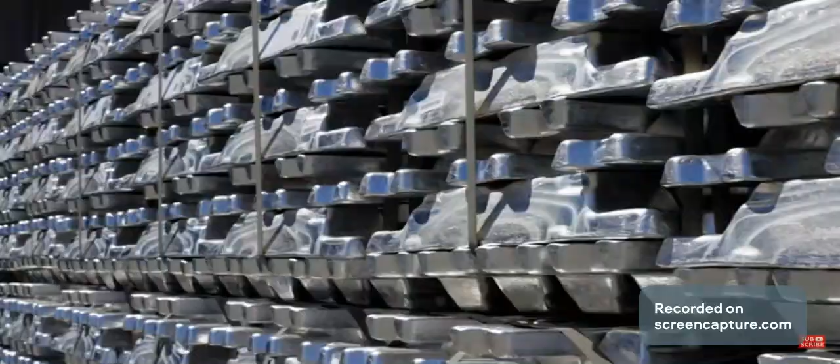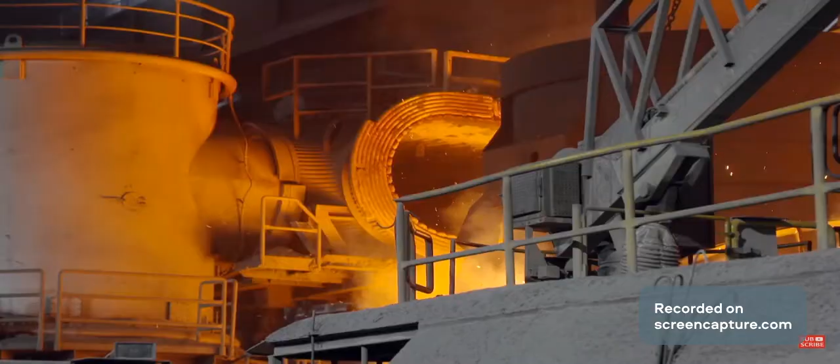Steel, aluminum, cement, indispensable for us all, but their production is a gargantuan problem for the environment. If we want to save our climate, our Earth, we need to profoundly change industry. Because it's heating up our planet, with greenhouse gases and an insatiable appetite for energy.

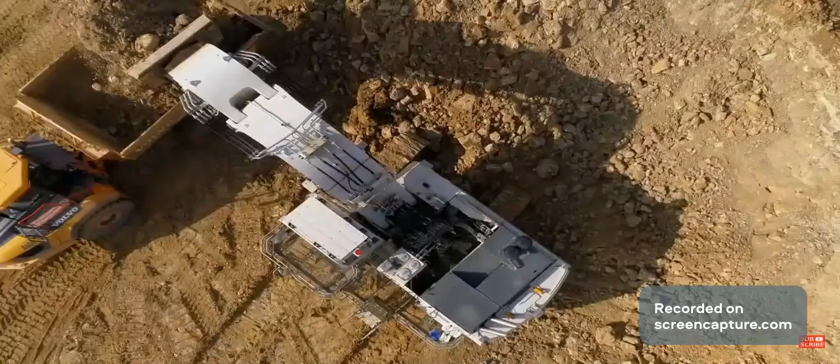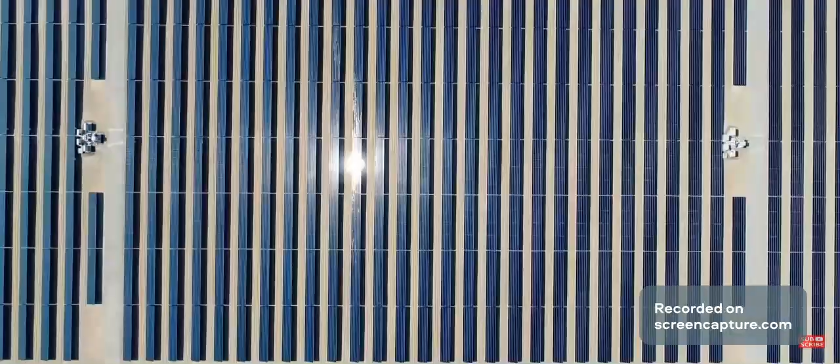A climate-friendly commute to work. Dr. Mohammed Safi's routine for 15 years. I cycle to work whatever the weather. I see it as a challenge, as a task. I need to do my bit in both my professional and my private life.

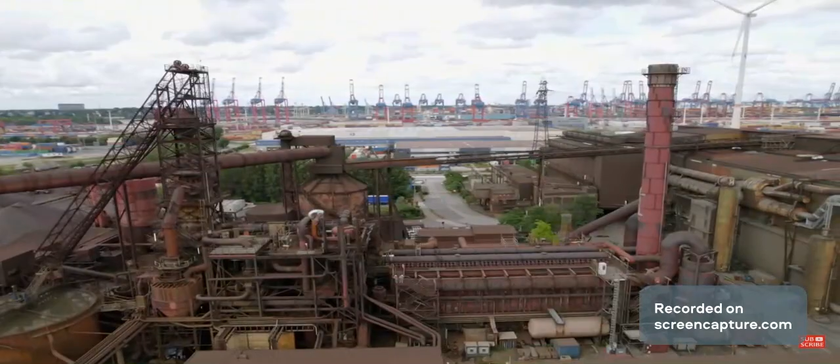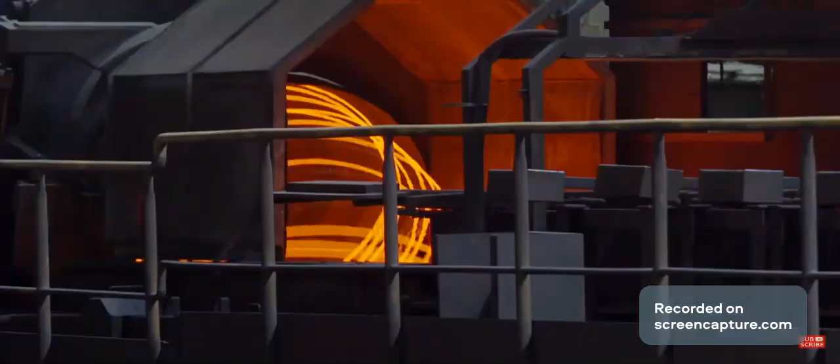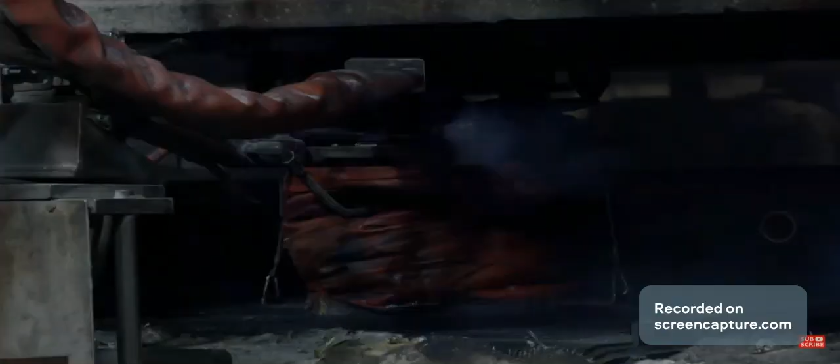But in the workplace, that's not so easy for Mr. Safi. His employer produces steel, making it one of the big environmental offenders. The engineer is deputy plant manager at ArcelorMittal in Hamburg, responsible for the smooth running of the furnaces. Steel. We can't manage without it. It's in buildings, vehicles, and household appliances.

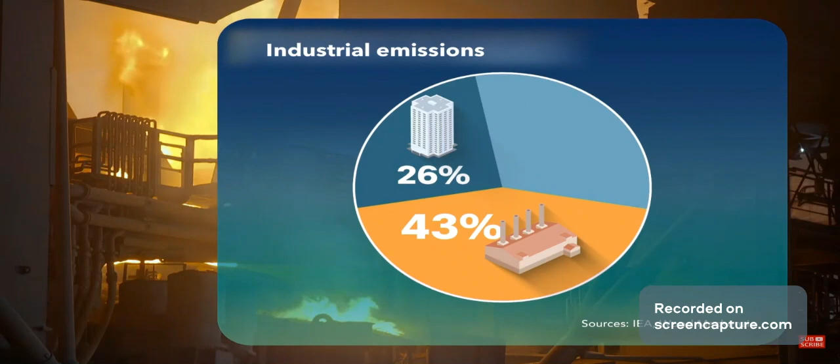But its production is harmful to our climate, and the steel industry isn't the only offender. If you include energy and heat consumption in the math, the industry is responsible for 43% of global emissions, significantly more than the construction and transport sectors. More than 70% of industrial emissions stem from the manufacture of just 3 basic substances: steel, cement, and chemicals.

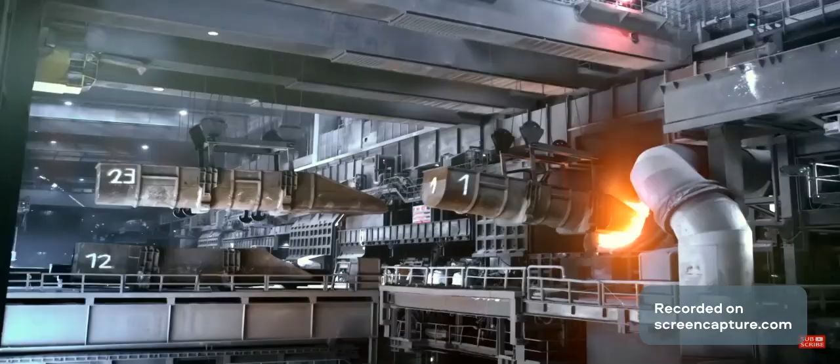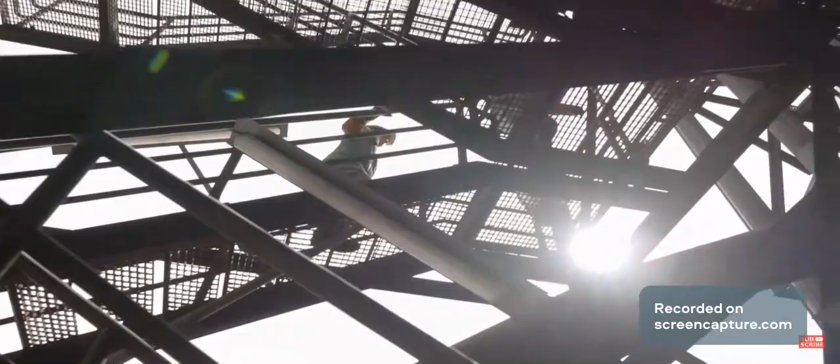Steel production was responsible for some 3 billion tons of CO2 in the last year alone. Mostly to blame, the blast furnaces, where the vast amounts of coal are burned. The production of 1 ton of crude steel results in 2 tons of CO2. Normally, but not in Hamburg. Here, something's happening that's a better fit for Mohammed Safi's philosophy.

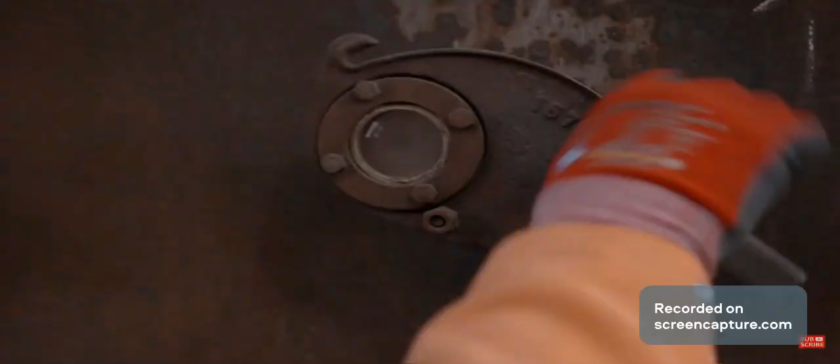I'm personally trying to live an eco-friendly life. That's why I'm pleased if the process I'm working in is also climate-friendly and isn't causing lasting environmental damage. But how's that supposed to work? Climate-friendly steel production? The first ingredient, natural gas replacing coal as a source of energy. This emits less CO2.

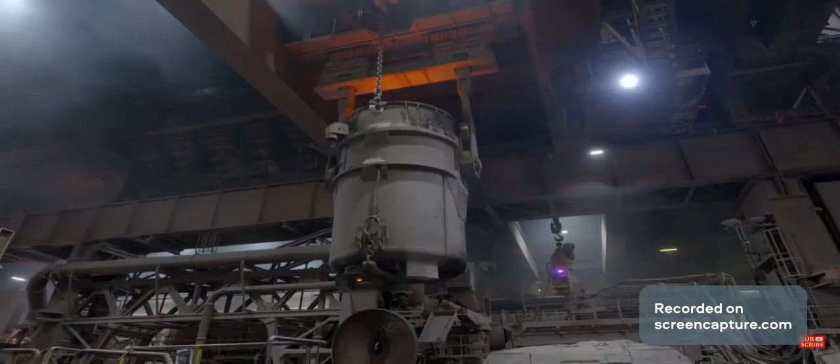Ingredient number 2, steel recycling, cutting emissions by 2/3 compared to production in the blast furnace. But researchers see perhaps the most potential in green hydrogen, a source of energy seen as a future replacement for coal and gas, which is expensive and now in short supply. It's a crucial time for Mohammed Safi and his boss Uwe Braun. They're discussing where to locate the new hydrogen plant.

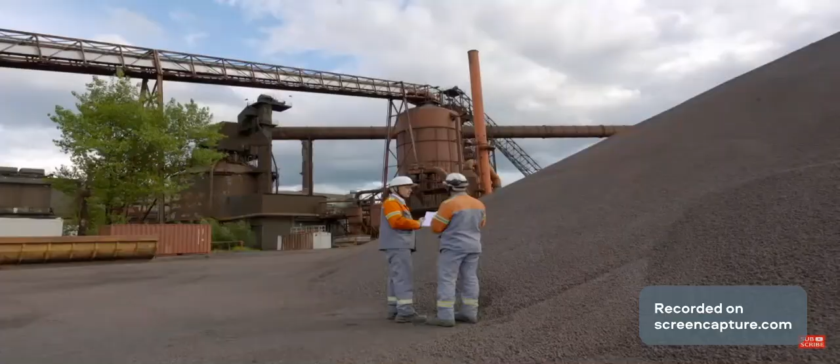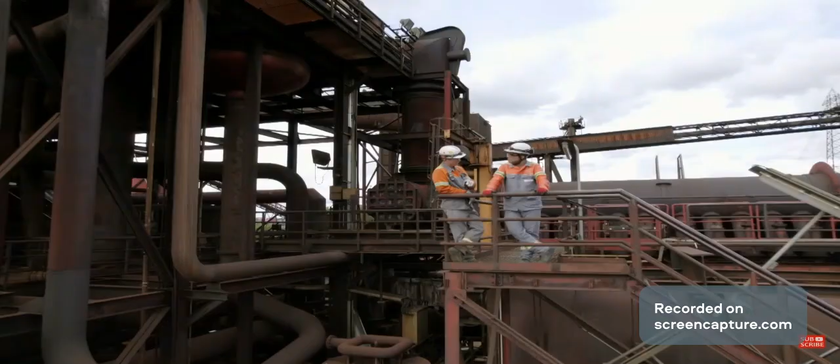We're the trailblazers. We've got the means to move things in the right direction. But we also need support on a political level. On the one hand, we need vast quantities of hydrogen. We need the green electricity and, of course, the economic framework for our products. In other words, it's going to be expensive. On the road to emissions-free steel, who's picking up the tab? And how long will it take?

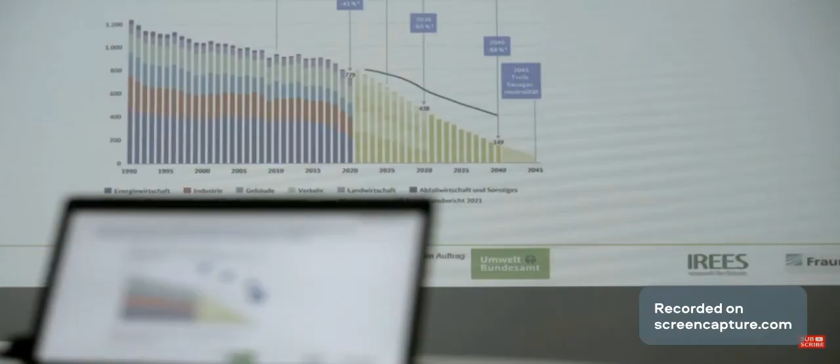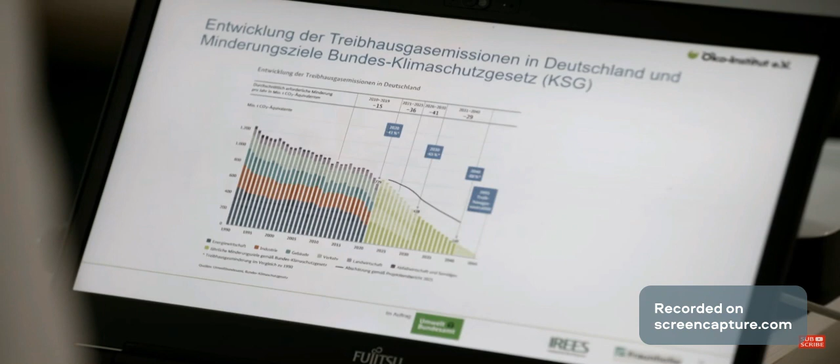Germany's climate action package sets out an ambitious roadmap for the years up to 2030. Economist Katja Schumacher says much of the pressure is now on industry. A lot still needs to happen before 2030. Emissions have to be reduced by another 30%. The government's official projection reports suggest that if significantly greater efforts aren't made now, industry won't hit its targets in 2030.

Some individuals are well on the way to hitting their targets. One of them is Mohammed Safi. He tries to adopt a green lifestyle wherever possible. He built his house in 2012 with environmental protection in mind. There are solar panels on the roof. His heating system runs on geothermal energy, making it 100% climate neutral.

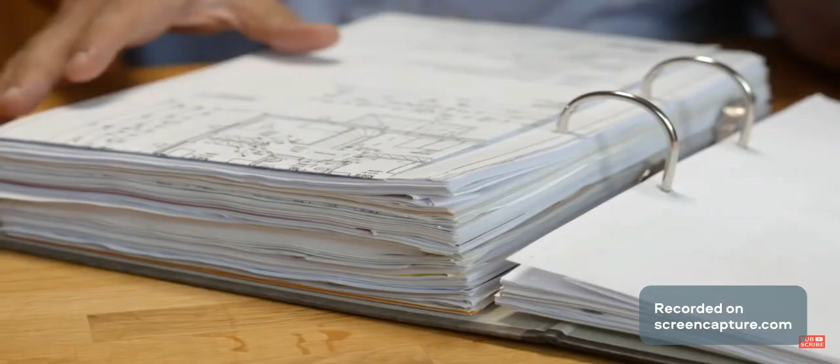But for the engineer, there's always room for improvement. Together with his sons, he weighs up how to make his home even more eco-friendly. At the moment, the roof only has solar panels facing south and west. It would be good if we could include the eastern side to use the sun's energy in the mornings too.

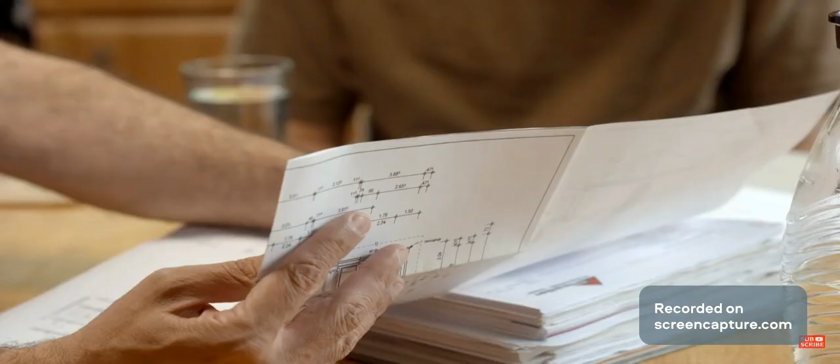Compared to what industry needs to do, his contribution to climate protection is tiny, but everyone can play a part, whether it's separating trash, installing solar panels, using electric cars or public transport. If every single one of us makes little contributions like these, of course the overall effect will be huge. But not nearly as huge as measures taken by industry. After all, it's been producing the most harmful substances to date. But can these emissions also be useful?

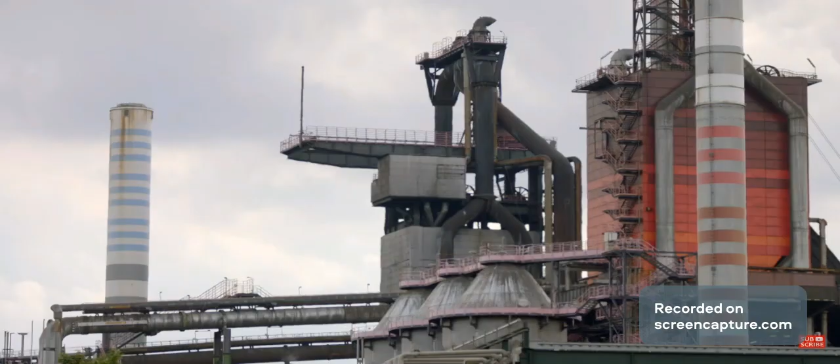Steel production at ThyssenKrupp in Duisburg. Here, experts are homing in on waste gases from steel production, primarily carbon dioxide and carbon monoxide. In the past, they were usually flared off.

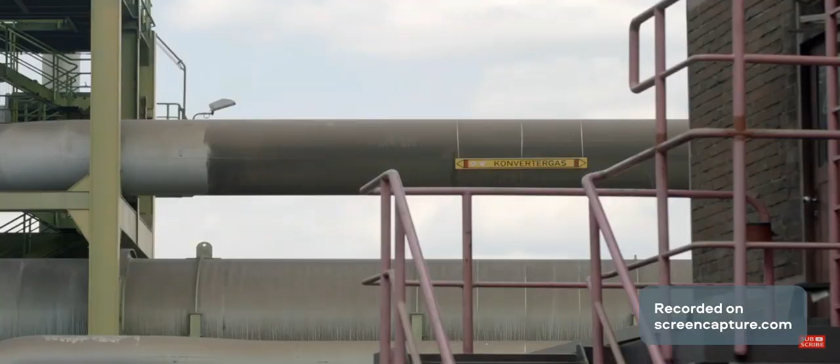Physicist Markus Oles now collects them with his plant. His goal, to utilize waste gases as a raw material. Today, it's not possible to design all chemical processes in a way that produces no CO2 at all. And steelmaking is ultimately a chemical process. The question is what to do with it afterwards. And we think we've found an answer. To pass on remaining CO2 emissions from one industry to the next, where they can be recycled as a raw material.

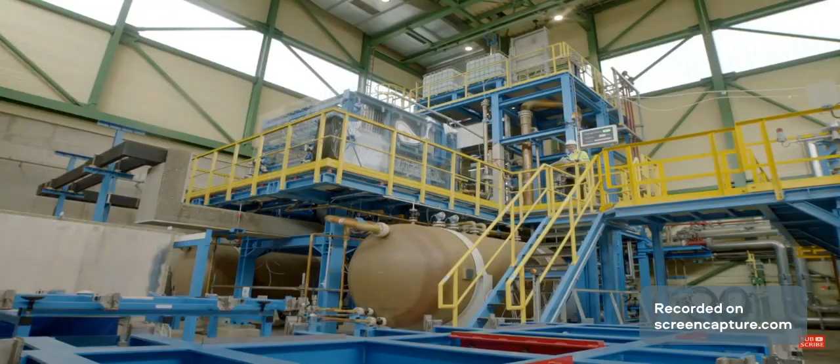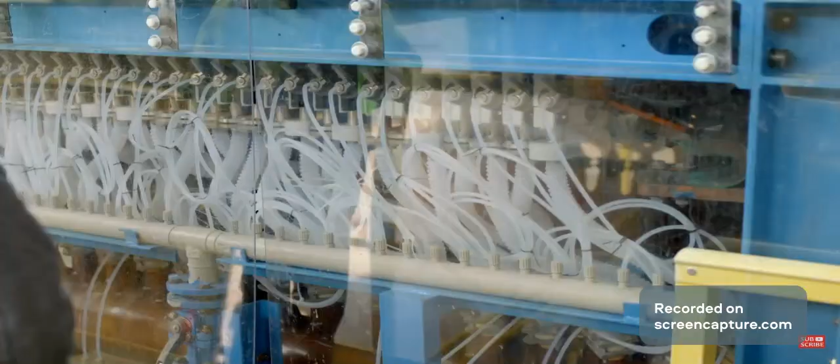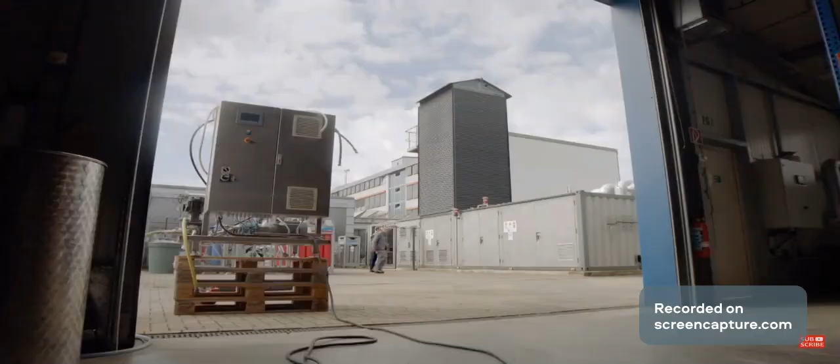The methanol approach makes it possible to remove CO2 from the steelworks process and turn it into input materials for the chemicals industry. Balancing things out with the steel industry on the one hand and the chemicals industry together means you can pretty much cut CO2 emissions by half. Sounds like a win-win situation. But how developed is the process? A test.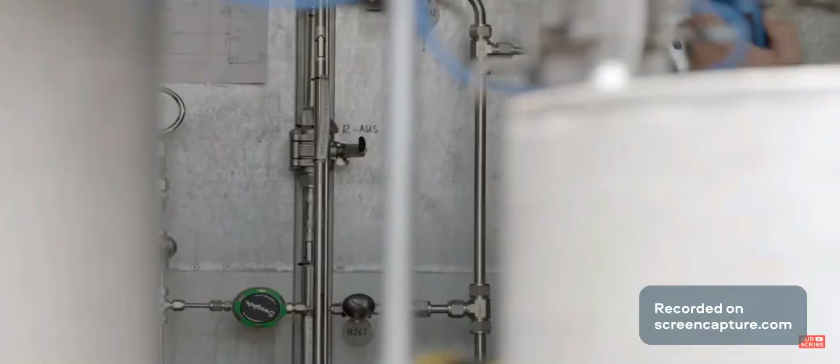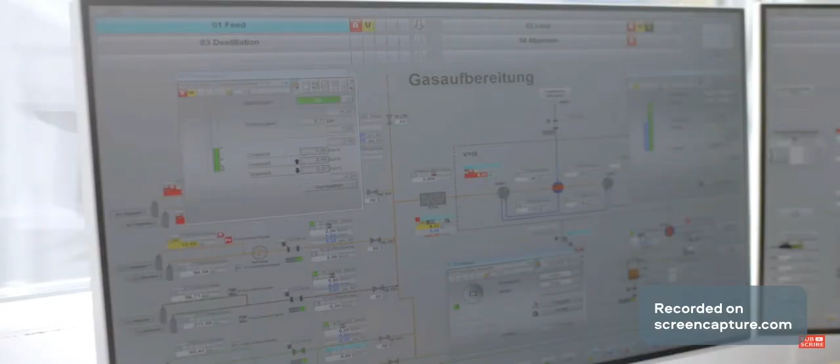I'm at the circuit gas valve and ready to open it. Okay, then I'll count down. 3, 2, 1, open. The plant must always be operated by 2 people at the same time, for safety reasons, in case toxic gases escape. You can relieve the pressure now. Pressure's under 6 bar. In the gas bottles, a blend of typical waste gases: carbon monoxide and carbon dioxide, both extremely harmful to the environment.

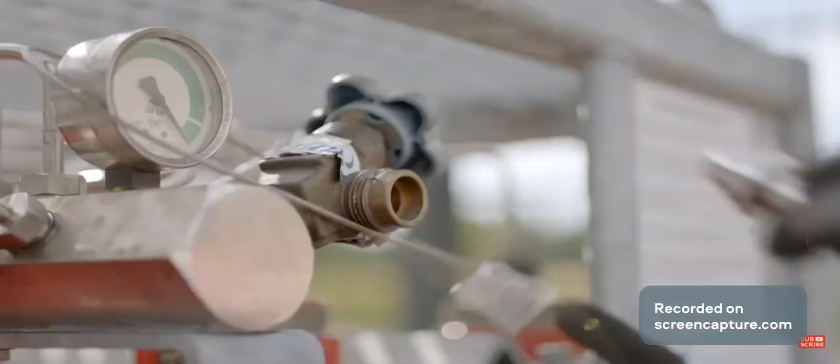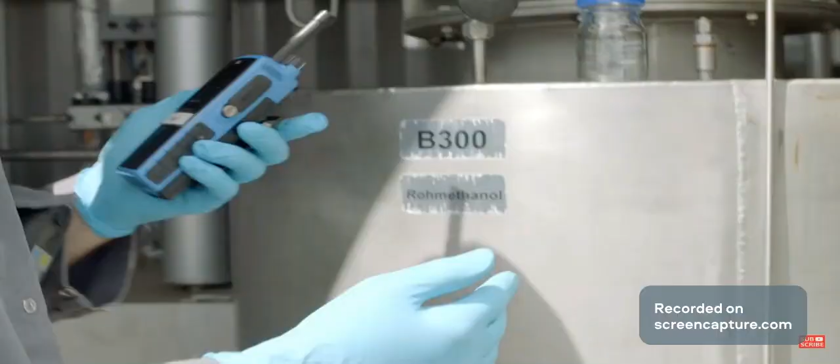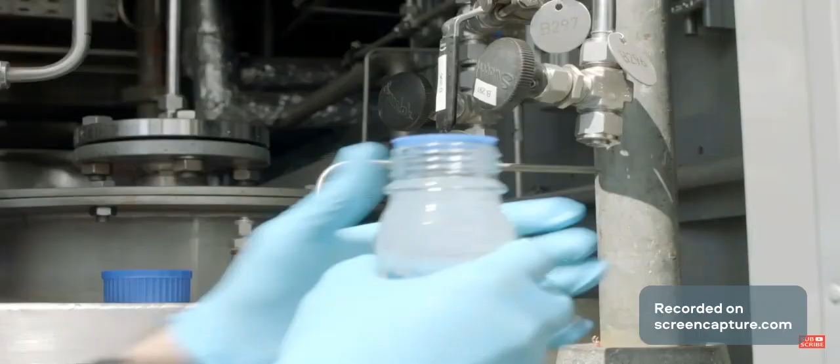A small miracle occurs inside the plant. The addition of hydrogen creates valuable, climate-friendly methanol. Ready to take a sample. Open the valve now, please. Okay. And there it is, the substance that could eventually clean up steel production. But it'll be years before there's enough of it for large-scale industrial use. Sampling complete. Please close the valve.

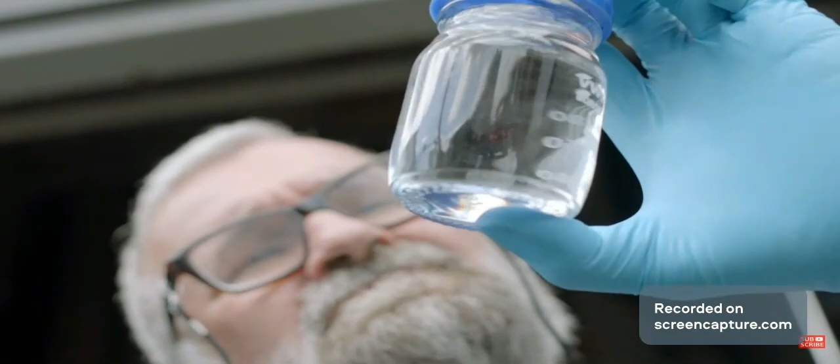Holding this liquid sample in my hand is a big success for me, because it was a real fight getting the details of the project right. And it will be even greater once the first production with waste gases has taken place at the Duisburg Steelworks. But at this stage, I'm very pleased with what I've got in my hand. A small bottle that represents huge change.

If the industry is serious about protecting the climate, vast plants will need to undergo a thorough remodeling. This will take time, but a window of opportunity is about to present itself. After all, many plants have had their day. Studies have shown that these sorts of investments in industry are due over the next 8 years. And if we make clever use of them, installing and investing in climate-friendly technologies now, then targets might be reached. But this has to happen across the board and not just in individual plants.

Here, it's precisely the other way around. The focus isn't replacing the old, but reusing it. Civil engineer Aminata Boare and her team are here to salvage construction materials, to protect the climate. This office building in Frankfurt is about to be renovated. Usually, much of the discarded material would end up at the dump. It's a waste of resources that are themselves responsible for creating a lot of CO2, says Aminata Boare.

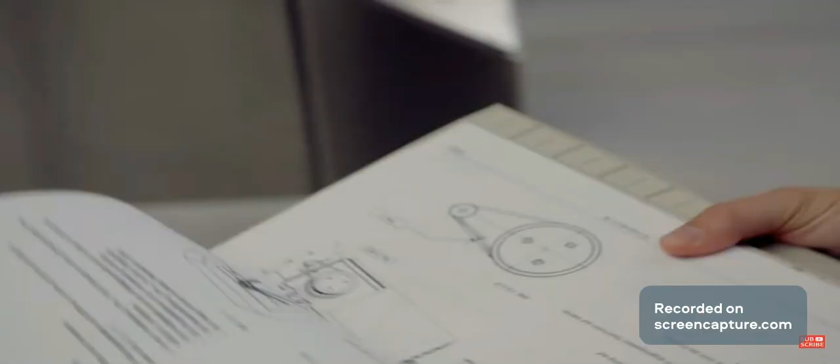She's been commissioned by the real estate company to give a second life to as much of the construction material as possible. The first step, documenting every section of the building. Maybe it's important that these can be adjusted, that you can make them narrower before you put them back in. Photos for the catalog. It's hoped even this turnstile will find a new owner. Theoretically, we can reuse all types of building material: flooring, doors, stairs, grate sections. They can all be removed and reinstated. We just have to ensure the deconstruction is worthwhile.

Each element is recorded in an app. Anyone shopping on here can ease their climate conscience a little. Reusing material means saving on the CO2 produced in primary manufacture. Ideas like this are urgently needed, but mindset change in the building sector is sluggish. In Germany, unfortunately, only 1% of materials are currently reused, although sometimes the condition of these building materials is still adequate for reintroduction. Or sometimes they just need a bit of preparation before they can be reutilized. But unfortunately, that doesn't happen. This means a lot of stuff is ending up at the dump when it